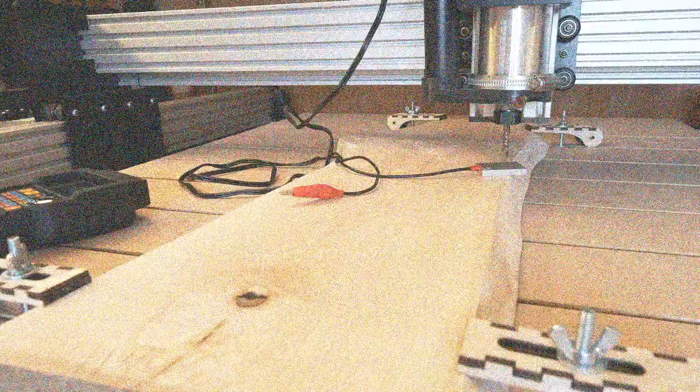Okay guys, right, back again. Before actually starting milling, I'll be zeroing my Z-axis.

Now, those of you more observant might be wondering why my zero point for this piece of timber seems to be halfway down the timber, approximately, and kind of on one edge. Well, this piece of timber, as you can see, is not a regular shape.

I did all the toolpaths for this using Aspire. I found it easier to take this point here as, basically as far as Aspire is concerned, the midpoint of the job. It was a bit tricky because there was no obvious place on this piece of timber to take a reference. So what I've done is drawn a line from the top corner of the timber to the bottom corner, and picked the halfway point as my reference, which from Aspire's point of view is the center of the job, even though the job's offset. It doesn't really matter, it's all arbitrary as long as you know where you are.

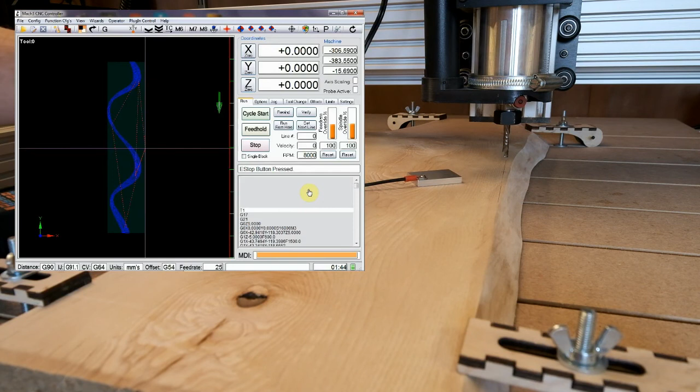So anyway, what we're going to do is zero the Z-axis. So I've got my touch plate here. Now the first thing I always check is that it's actually working, that the probe is working.

So if you look on the Mach3 display, which I think is popped up in the corner of this video, just underneath the machine coordinates, it says axis scaling and probe active. If I touch the croc clip against the touch plate, you can see the probe active line going green.

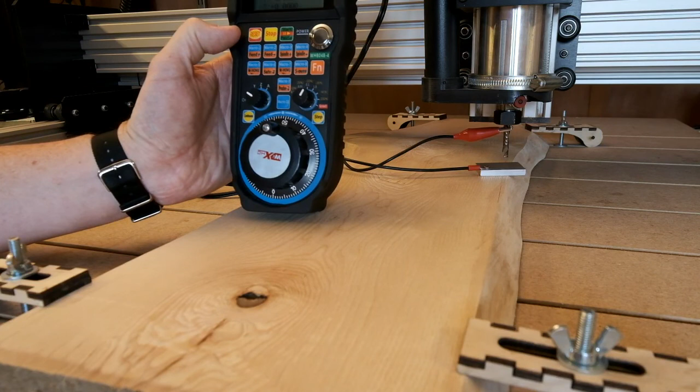So we know the connection's good before we find out it's not good by ramming the bit into the touch plate. So then I connect the croc clip to the bit, move the plate under the cutting bit, and then... you can see that okay. Currently the whole thing is in reset, so if I press the reset button...

Now I can hear the motors whirring. Now if I hit my probe Z here... zeroed. So I then remove the croc clip, I don't need this anymore, so let's take the whole thing away before it all goes horribly wrong. Put that to one side.

Now I can then check to see if that's zeroed correctly. If I press my work home, so that's perfect. You couldn't get a sheet of paper under that, I wouldn't think.

Okay, so what I'm going to do now is I'll come back in a second once I've got the dust extraction connected, and we'll start milling something. So I'll be back in a moment. Cheers.

Okay guys, right, back again. Right, moment of truth, about to start milling. So we're all set up, dust extraction is connected, pretty much ready to go, I think. It's going to get very noisy, so you probably won't be able to hear a thing apart from dust extraction, but here we go.

So I'll turn the dust extraction on, and then the router. And then we'll give it a go. So far so good.

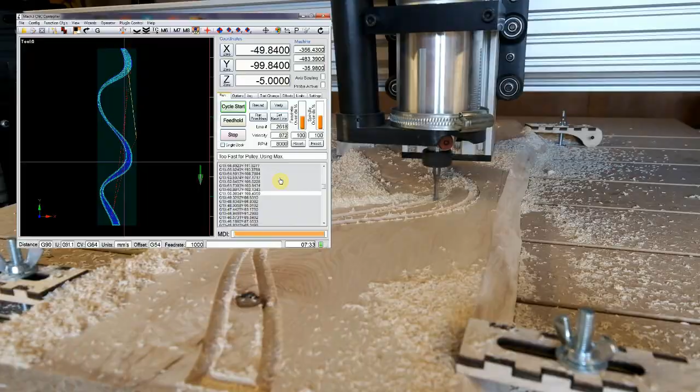Okay, gentlemen, well that's the first stage complete. So I've now got my nice milled river with about a 5mm gap. You can't quite see it, it's off the bottom of the camera. There's about a 5mm gap. It's got a nice finish. Oh yeah, I didn't use the compression bit in the end. I decided to use an end mill, 6mm end mill.

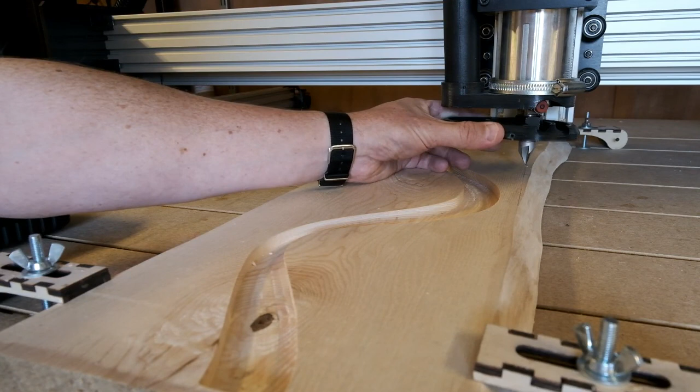So now the next stage is the engraving. Now, one thing I did forget to fit, there's always one thing, there was an awful lot of spoil went everywhere rather than up the dust extractor because I forgot to fit the bottom part of the shoe. And unfortunately with this particular router, its exhaust air flow is actually straight down onto the cutting board.

And the good thing about this little shoe adapter is that it's got a channel in the side here, and it directs the airflow out of the side of the shoe rather than down on the board, but I forgot to fit it. Normally I would have brushes here, but I decided not to fit brushes, otherwise you can't see what's going on. Oh dear. So it was tending to throw quite a lot of spoil all over the place, so you always forget something. So now I'm going to do...

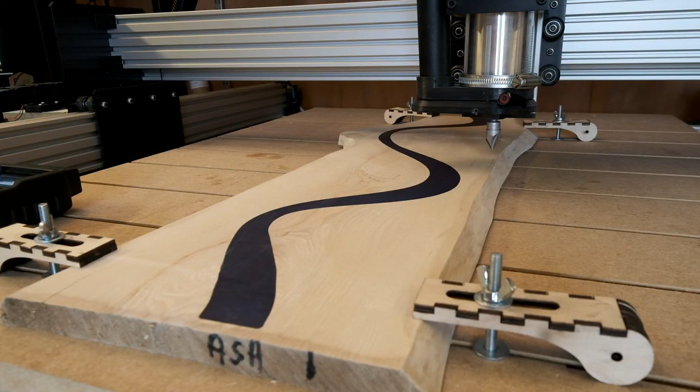Okay guys, so as you can see, I've poured my river down the centre of this nice piece of ash and, well, not finished the surface, but given the surface a nice series of sands. So now I'm going to actually perform the engraving of the top surface, now the river's in place. So yeah, that's what I'm about to start doing. So I'll be back in 2 secs.

Okay, as promised, I'm back. Right, it's going to get noisy again, so I'm going to start the dust extraction and turn the router on and then get milling. Dust extraction on. That's the router running. Job's running. Fingers crossed.